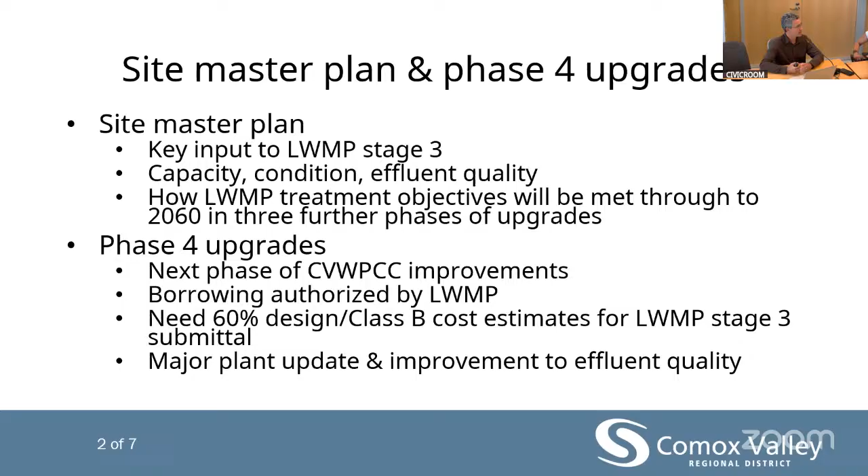The phase 4 scope components were known because of the headworks, that's where all of the wastewater first enters the facility and is screened. We knew that the electrical infrastructure is over 40 years old and needs to be upsized and upgraded to satisfy the expanding facility as well as for safety. We knew that the existing admin building needed to be upgraded, as well as the grit removal system and the addition of the ultraviolet treatment system.

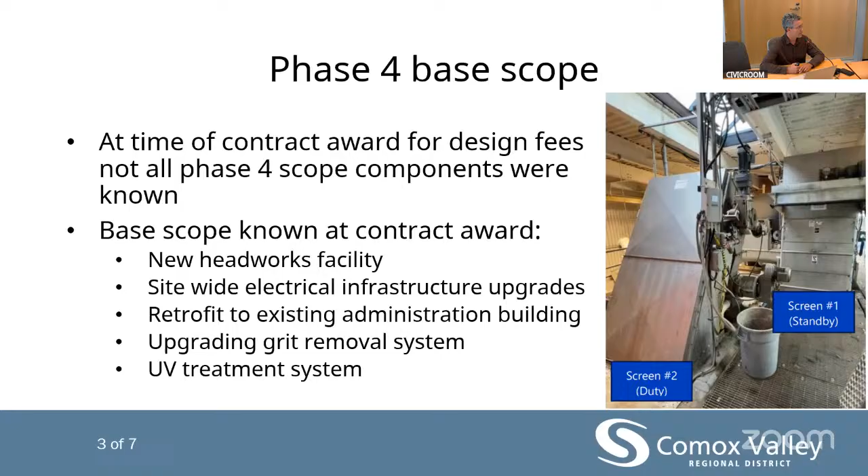The additional pieces that have now become clear through all of the additional work that we've done over the past 18 to 24 months, some of which have been addressed recently in reports through the commission, but briefly: the chemically enhanced primary treatment system, or CEPT. So that's part of our effluent treatment upgrades, as well as the addition of a fabric filter, the increase in our outfall capacity.

So thankfully the condition assessment performed earlier this year concluded that we can continue to use that pipe, but we need to increase the capacity to allow us to use it for another 10 to 15 years. We need a new mixed liquor splitter chamber and a reclaimed water system to help us further reduce our use of potable water on the site.

We'll also be doing a value engineering process to help ensure that we are delivering as tight and efficient a scope as possible, and undertake some upgrades to one of our bioreactors as a pilot for embedding within the design. And finally, survey and subsurface utility locates.

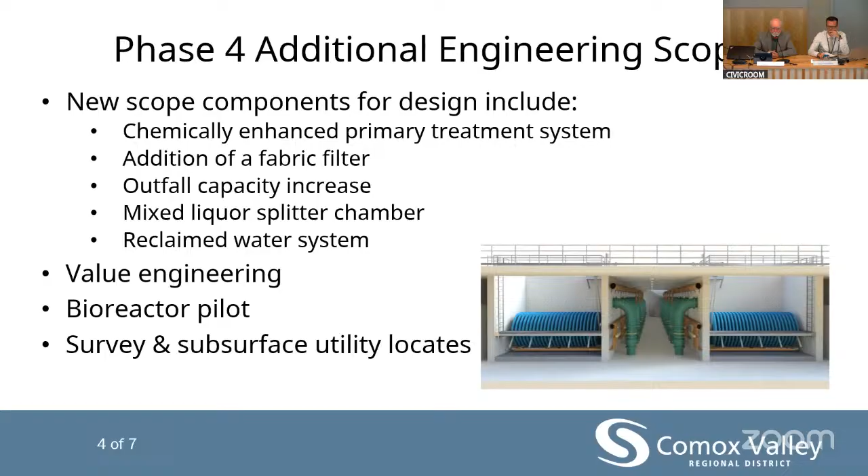This plan shows just at a very high level the components that will be touched by the phase 4 upgrades. As you can tell just by immediately looking at it, they are plant wide. On the top left, currently there's just the foundation of an old storage building, but that's where our new headworks will go. And you see that dark line coming in through the forest. The conveyance project currently terminates right at that location.

It will temporarily come over into the plant and discharge to the existing headworks, but in the future it'll tie into the new headworks up at the top left. And then all the way through the various upgrades in the plant, and the top right is the effluent storage basin, where we currently have pumps that help push our effluent out into the ocean at high tide, and that's the part that will be upgraded to provide us additional capacity.

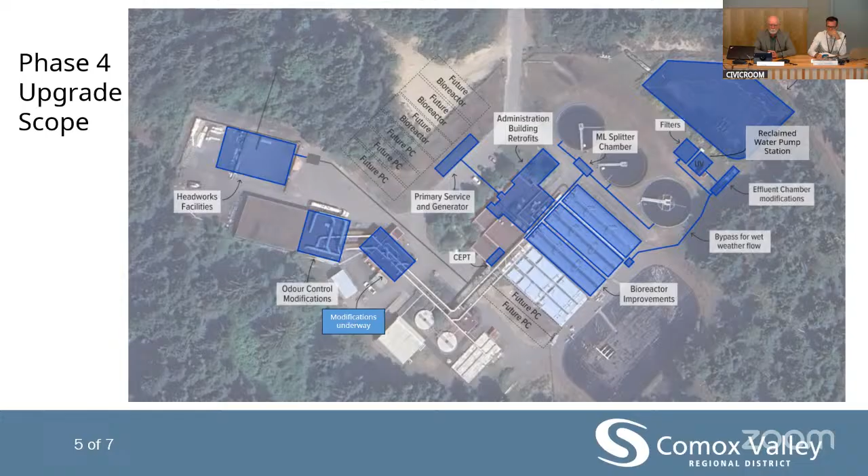And then the various other components. I won't dive into the details today, but it is a very comprehensive upgrade to the facility that's necessary now as the plant approaches 45 years old.

So to fund this additional engineering work that I've detailed, we are recommending a contract amendment of $2.26 million. That, in addition to the $3.8 million contract that's currently in place, would bring us to just over $6 million engineering cost to bring us through to the issue for tender. And just a note at the bottom there that, in terms of the updated cost estimate for the project, these total engineering costs are still tracking well within the industry standard as a proportion of the total estimated capital.

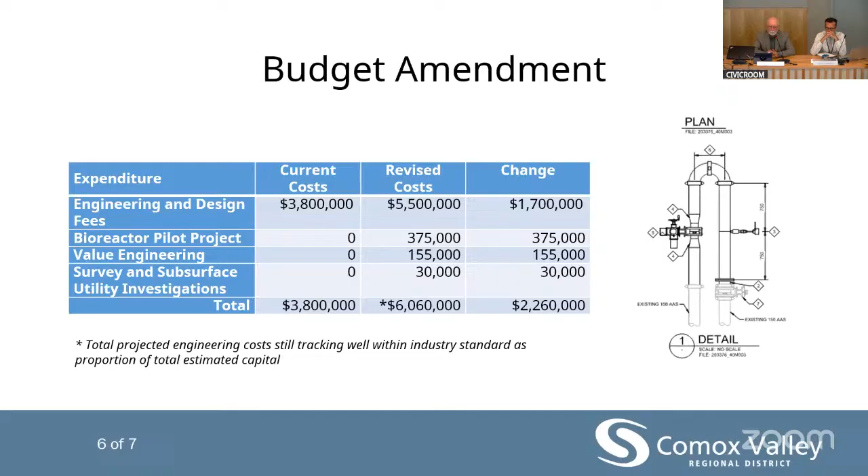So our next steps are, should you support this direction, we'll continue to explore options to phase or stage the upgrades to minimize the cost impacts. A lot of our work to date has been to try and spread these costs out as much as possible. We'll undertake the value engineering workshop to further help minimize the costs. And note that our current financial plan includes just under $50 million for this project. We are in the final stages of an updated cost estimate, and we're hoping to bring that to the commission in October or November.

And a note that this week we'll be submitting the application to the Strategic Priorities Fund for a $7 million grant. If successful, that will definitely help a bit. And finally, the draft site master plan was shared with the Technical and Public Advisory Committee last week, and we'll be discussing that at their next meeting in November. So that's it for me, but I'm happy to answer any questions about this approach.

Thanks very much, Chris. Questions or comments? Director McCollum. Thanks, Chair, and thanks for the report. There's some really interesting information in here. I have one follow-up question around those fabric filters that were highlighted in the earlier slide. Is the intent of that to address smaller particles like microplastics and those types of concerns that we're increasingly hearing about?

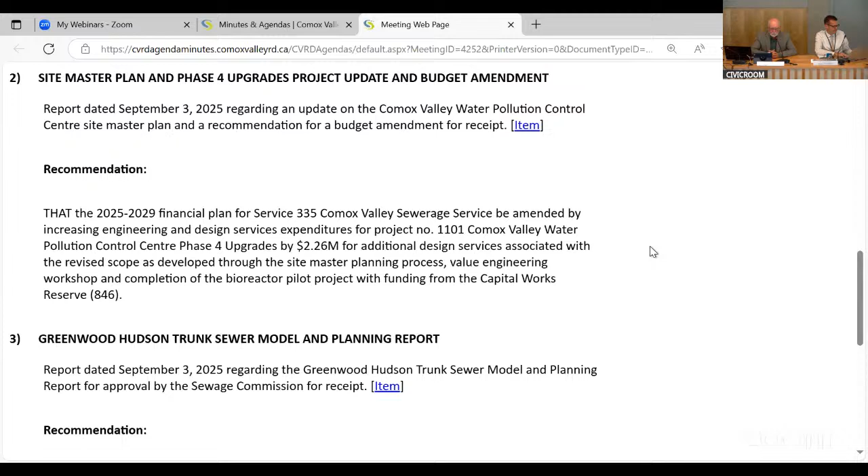Thanks very much. And we'll move on to item number 3, the Greenwood Hudson Trunk Sewer Model and Planning Report. And we have a September 3rd report. Motion for receipt, please. Moved by Grant, seconded by Cole Hamilton. And back over to staff. Thank you, Chair. And again, Chris LaRose will be introducing this report also. Chris. Thank you, James, through the chair.

So again, I've prepared a brief presentation to help walk through this additional significant report. And so this is an update on the outcome of the Greenwood and Hudson Trunk Capacity Servicing Study. So just thought I'd start off with a brief overview of those trunk lines. So the gravity lines are shown in red on this network, and the remainder of the regional system is all force mains. So this is the extent of the CVRD gravity network.

And if you can see the 3 lines coming together in the center there, that's roughly around the airport. And the line heading up to the north is the Greenwood, and it heads up to Anderton to tie into the City of Courtenay's Greenwood pump station and force main. And then the section heading off to the left is the Hudson, and that goes over and connects in with Comox and Courtenay. So those two, the Hudson and the Greenwood, were built in around 2018.

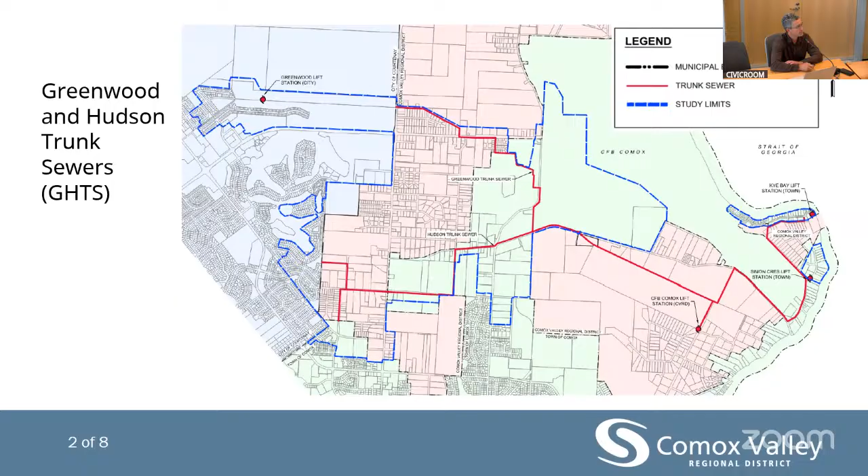So in early last year, we were made aware of new developments in the town of Comox with densities far exceeding those that were included in the original design assumptions for the Hudson Trunk. In the summer of 2024, we initiated some modeling with McElhanney, and the result of that modeling suggested that sections of the Hudson Trunk were not sufficiently sized to handle the full output from those two new developments in Comox. So then in fall 24, we initiated a detailed servicing study to model the capacity of the entire gravity system with our new understanding of projected development densities in the area.

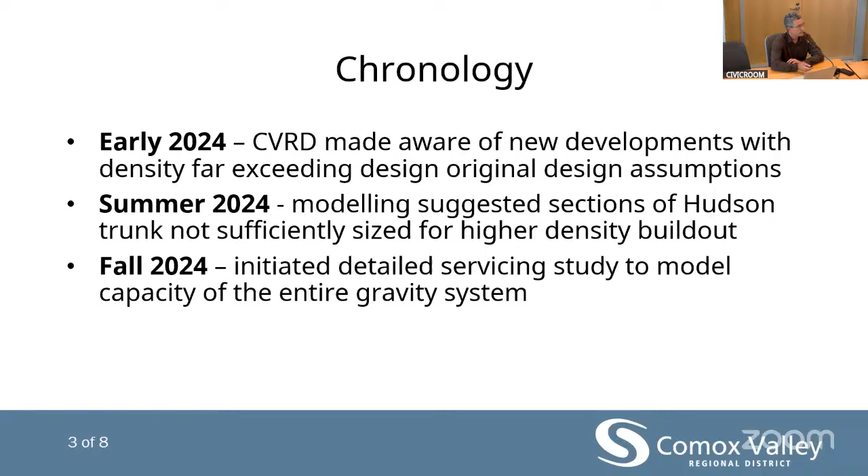So yeah, as I mentioned, the model was for the entire gravity conveyance system down to the CFB Comox pump station. At that point, it's pumped through a force main to the plant, and that infrastructure was not included in this review. So we worked closely with City of Courtenay and Comox staff to develop future land use and growth projections. This was quite an exercise.

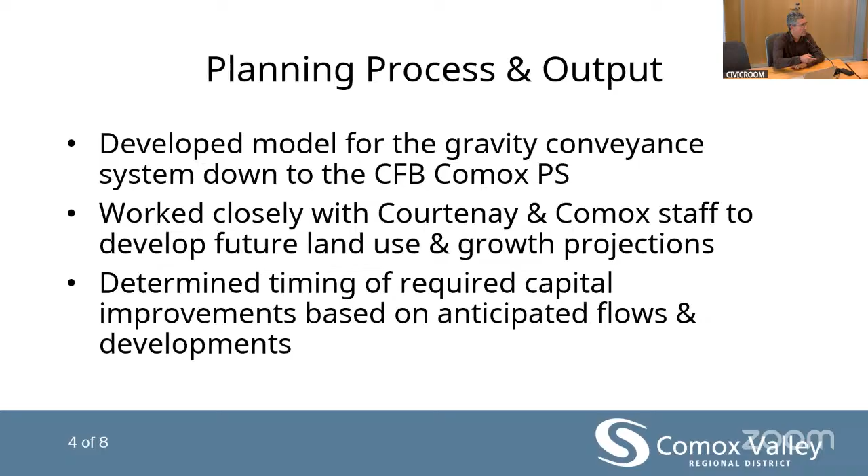It involved numerous meetings. Of course, in parallel with this, both municipalities were working through addressing the implications of Bill 44. So there were a lot of changes happening that needed to be done in parallel and fed into this process. And then the output is the timing and extent of the required capital improvements based on the new understanding of anticipated flows and developments.

So the projected population to be served by this gravity system in 50 years is approximately 39,000 compared to, as you can see, the bar chart. So currently we're about 3,000 or 4,000. And so over the next 50 years, our best guess is that we'll be adding about 33,000 people in that area, all of which, regardless of what density the development occurs at, will be using that infrastructure.

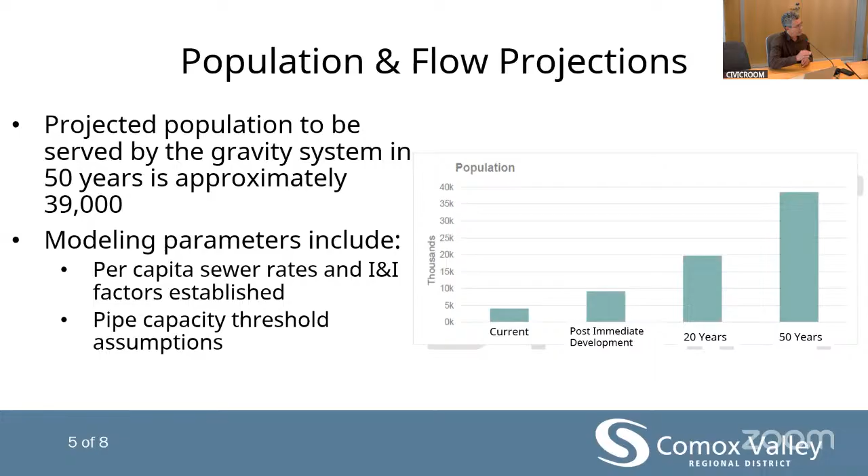So some of the other key parameters that went into the process were the assumptions on how much sewer flows those people would be generating per capita, how much I&I will be coming into the system, and what our tolerable thresholds in the pipe are. Like, are we okay with 100% loading, or do we want to model 80%? And the answer to that is it depends on where we are in the system.

So the key output, as I mentioned, is an understanding of what infrastructure is needed. So the planning output is expressed in terms of immediate infrastructure needs to meet the known development, infrastructure needs to meet the 20-year projections, and then the 50-year. So for the immediate, we're not actually looking at much of the pipe needing to be upsized.

So you can see it's calling for a new lift station and force main at the low point near McQuinn Road or Hector Road, in that general area. And then upsizing 285 meters of the Hudson Trunk on Knight Road, so approaching the roundabout. And the estimated cost of those pieces that will need to be done fairly immediately is about $9 million.

And then to satisfy the 20-year projected growth, we're looking at a more significant chunk of the Hudson Trunk, so 2.5 kilometers, and then an upgrade at that lift station, so upsizing the pumps. And that would be, in today's dollars, about another just under $10 million.

And then long term, to meet the demands of that full size, 30 plus thousand people, a section of Greenwood Trunk will need to be upsized, as well as the remainder of Hudson Trunk, and then another upgrade at the pump station. So these are very high level. So just referring to that note at the bottom there, the timing is based on projections. Moving forward, we will be very closely monitoring the actual pace of development, and making sure that these projects are within the development cost charge project lists as they come up and as they're needed.

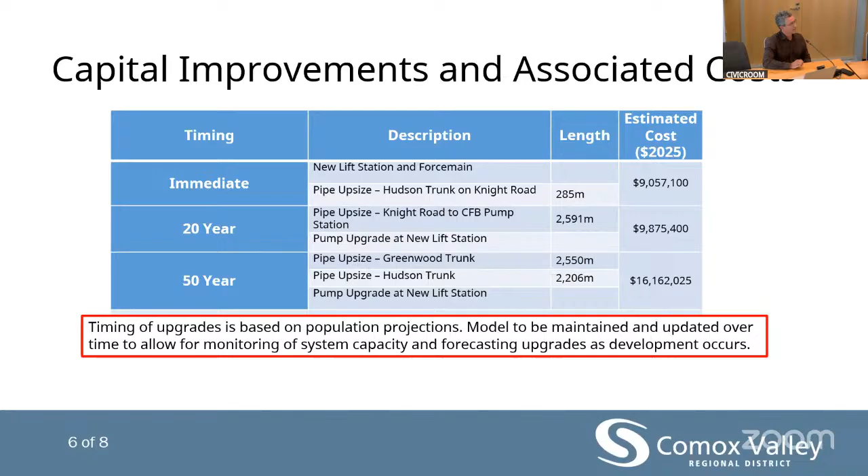Thanks for that. Good discussion. There don't appear to be further questions or comments. So thanks very much, Chris, for all the work on that. Is anyone opposed to receipt? Receipt is carried, and we do have a recommendation that

the planning report be approved and the capital improvements as detailed be embedded in the next financial plan, partially funded by developers through funding agreements, and that staff develop a development cost charges credit policy to guide same. Moved by Grant, seconded by McCollum. Any discussion further? All those in favor? And no one is opposed.

That's carried unanimously. So we shall move along to our final item of business today, and that's the Comox Valley Sewer Conveyance Project Construction Progress Dashboard. And we have the dashboard dated September 25th. The motion for receipt, please. Moved by Grant, seconded by Cole Hamilton, and we'll turn it over, I believe, to Charlie.

Thank you, Chair. Yeah, just a short update today just to update on the status of the project and to talk about traffic, which I'm sure is on everyone's minds. So some photos from all the different sites. So this is at the Courtenay Pump Station. You may have noticed driving past the site that we have finally backfilled the very large hole in the ground, and the exterior concrete of our underground wet well is complete.

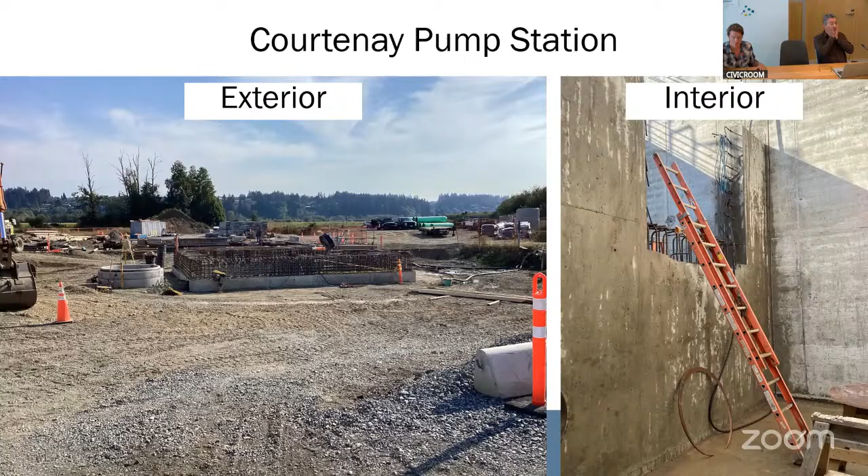That second photo on the right there is from inside. We've started to build the interior walls that separate the two different halves of the wet well, and progress is going on inside that concrete box deep underground there. It's going well. At Comox Pump Station, they're pouring this concrete today. So this is the building extension on the east side of the building where our generator will be housed.

And so now that we have that concrete poured, we'll be able to get that building enclosed for the winter work. And so we'll have an inside place to work to hopefully mitigate some of the noise of our construction down there from the residents there. And that work is going well as well.

So these are two photos from down on Comox Road where we're starting to do the critical tie-ins between the old pipe and the new pipe. And normally when we build a new pipe, we don't connect to our old pipe. But the reason why we're connecting to the old pipe at both the western boundary of IR1, which we call the butterfly area, which is near the vet there, and also down on Bayside Road, is that we currently have an above ground bypass running. You may have seen the pipe running along the road.

Now that will be decommissioned at the end of this month, and we'll be sending the sewer from our existing Courtenay Pump Station along the existing pipe along Comox Road all the way till the western boundary of IR1. Then it is going to jump into the new pipe through IR1. We can all remember that we made the decision to protect the archaeology by removing the old pipe and putting the new pipe in. And then once we get to Bayside Road, it's going to jump back into the old pipe and head out to the estuary. And that'll be the case for this one last winter while we finish the pump stations.

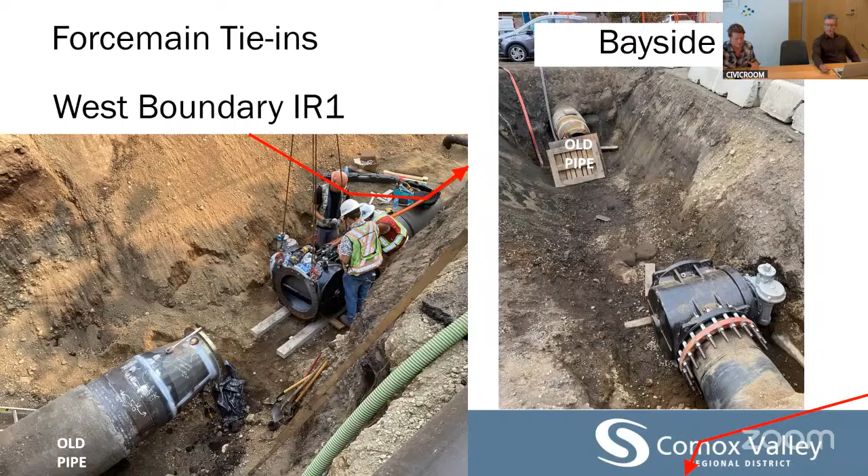And here are some photos from Comox Avenue. On the left there, you can see the north side of Comox Ave all fully paved out, and the new sidewalk running along there. And on the right-hand photo, that's the subgrade prep of the southern half of the Rodello roundabout. So that's a very large parcel that's kind of being created by the Providence Health Building. That roundabout is kind of offset down into, and they're building on the Rodello southern half of that roundabout right now.

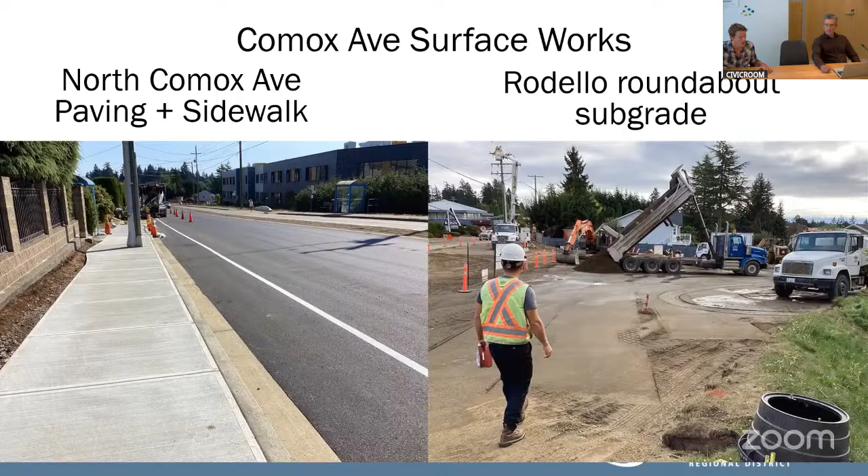So, upcoming milestones. You may have seen some of the media releases about the change in traffic for next week, and that's our one last piece that is at Glen Urquhart Creek. There's a very custom stainless pipe that's going up and over the existing culverts there. So we need to stop the right-hand turn at 17th Street Bridge for one more week to get that custom piece of pipe in there.

And then at the end of this month, I mentioned that we're going to be removing that bypass and we're going to be paving out all of Comox Road through IR1. And that will allow us to really clean up that area before Truth and Reconciliation on September 30th.

And then if the weather gods hold, and we can talk about this a bit more, we have the paving of the Glacier View roundabout set for middle of November, and the paving of the Rodello roundabout for the middle of November. And that would allow us to remove all of the detour route and allow two-way traffic on Comox Road back into Comox.

I only have one last slide, and I'm very happy to talk about the traffic. But I did want to kind of refocus everyone back on what the traffic management plan was. I think everyone is getting to the stage of the project where we're hearing a lot of frustration from everybody. People are saying, you're so far behind, you're killing us out there. And I want to remind everyone of what the approved traffic management plan was. It was January to fall of unidirectional traffic from Rodello to 17th Street Bridge.

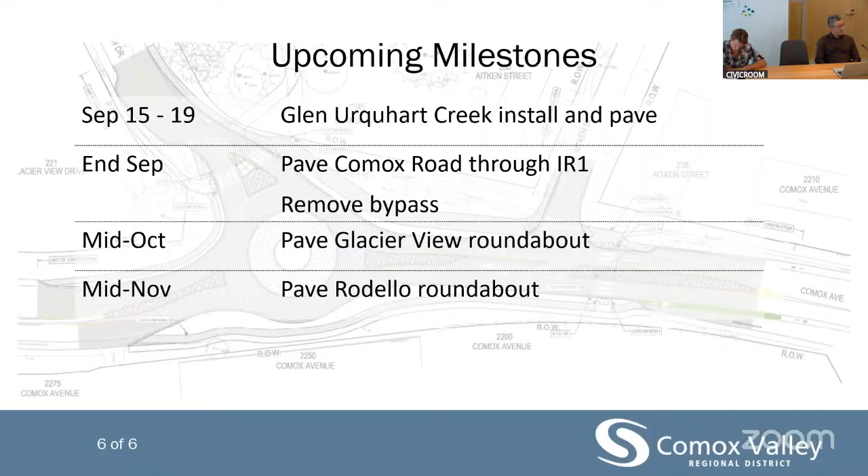Thanks very much. Good questions, and we're all anxious to see this project completed, but we want to see it completed well. And we appreciate the vagaries of the weather influencing that. So thanks very much for all the work that's going on, both on the public relations front as well as the construction on the ground. And be assured that you have our wholehearted support in finishing this project as determined and according to the schedule and budget that's outlined. So, thank you.

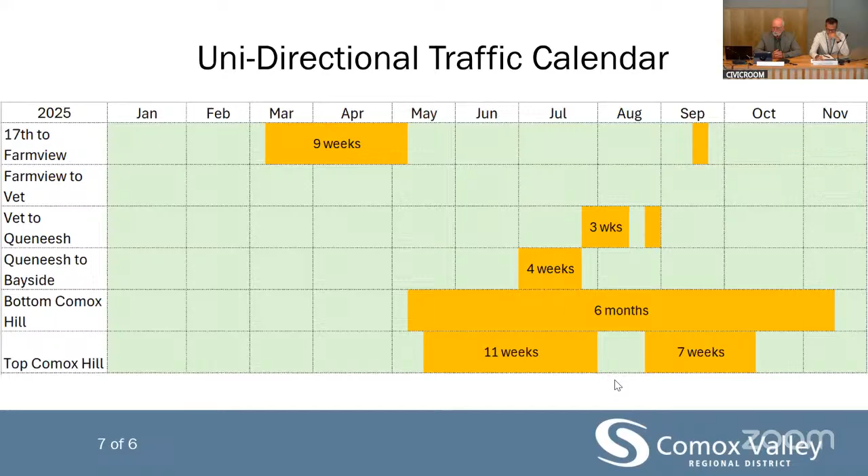And with that, this motion is for receipt. Anyone opposed? That's carried. And our final business is to terminate the meeting. Moved by Grant, seconded by Blacklock. Very good. He's in the minutes. All those in favor? That's carried unanimously.